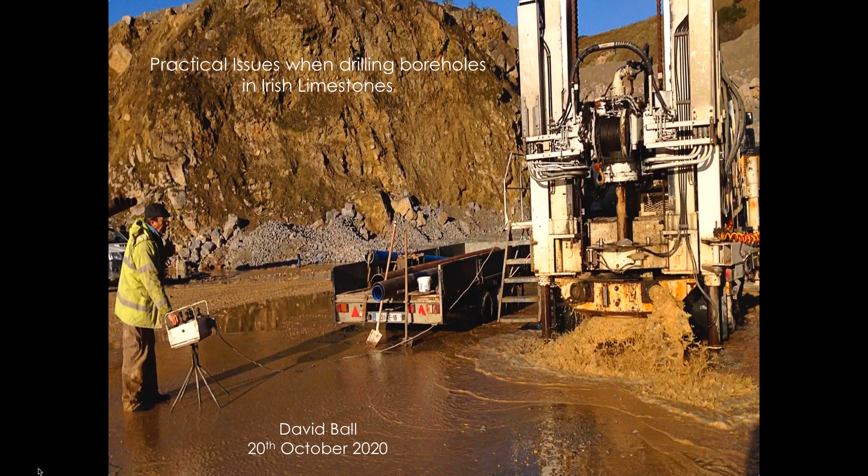As you can see, drilling in limestones in Ireland can be both rewarding and exciting, and it sometimes can be stressful. When you're drilling in limestones in Ireland, you're going on a trip down into the unknown. You can forget your conceptual models of predictable groundwater flow in a porous media. Instead, what you're doing is going down into a world of impermeable rock, hoping to find a water supply.

Hopefully find some breaks in the rock. And it's solid rock, it's impermeable rock. Hopefully some of these breaks will have been widened by karst solution weathering. Hopefully some of these conduits, breaks in the rock, will be interconnected and you'll be able to get a water supply. In essence, you're going into a subsurface world where the groundwater flow system is taking place in a plumbing system. Imagine a series of drainage pipes, wide pipes, underground. You're trying to hit one or more of them.

This presentation provides illustrations that support the detail in the paper that I've got in the proceedings. I can't cover everything in this presentation. I don't suggest that you read the paper right now. I suggest you keep it, so that when you're perhaps going to get involved in some of this sort of work, you can read it beforehand, and hopefully it'll give you some pointers, some tips on how to proceed and how to set things up.

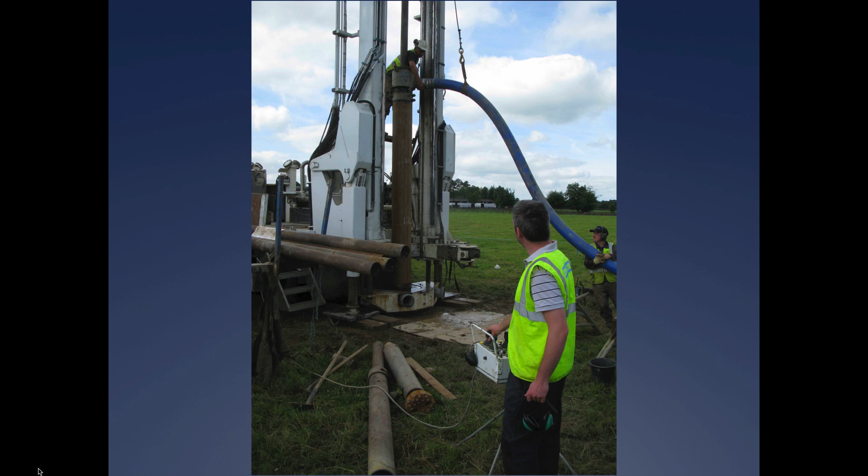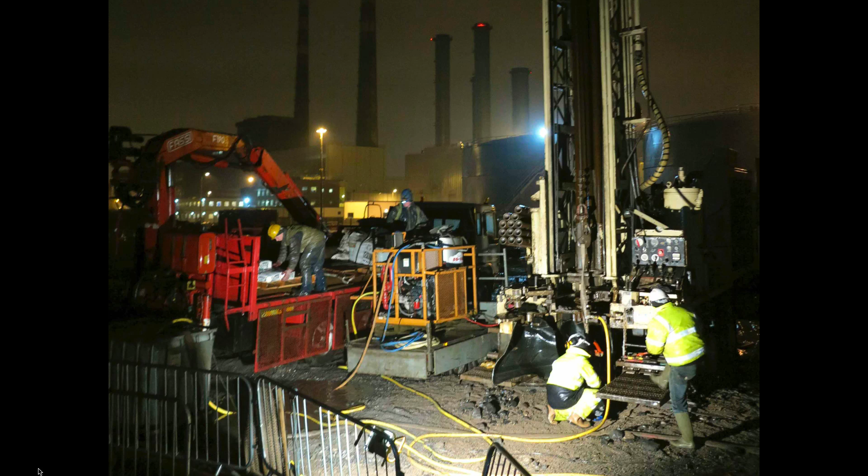The first image is making a fundamental point, and that shows that a hydrogeologist is a part of a team. Here I'm stepping in to run the rig whilst the driller is engaged on something else. Here's Oliver Higgins working in Kildare. He's helping the driller use a Symmetrix system while going into the Waulsortian below the sands and gravels of the Kildare aquifer. And here's David Gagan and Bruno Taillard doing cement grouting next to the power station in Poolbeg, drilling again into the Waulsortian in Dublin Bay.

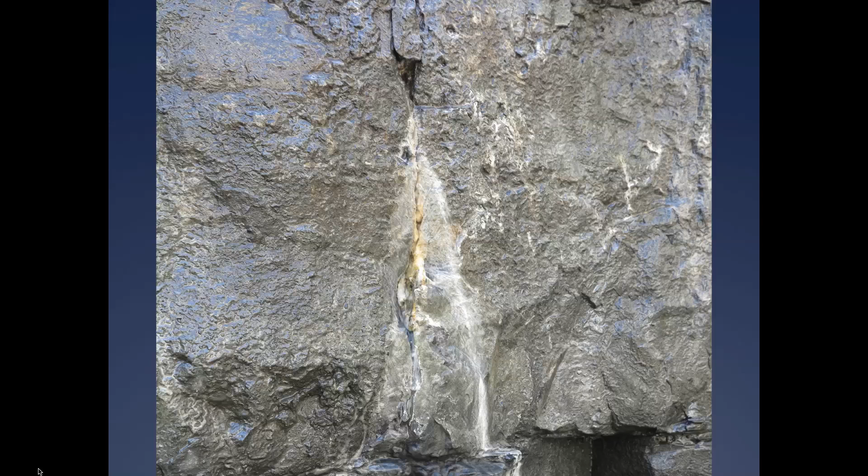When you're going off into the subsurface, you're hopefully going to find something like this. This is a small crack in the limestone in Dublin, and that'll just give you a small water supply. Hopefully you can do better than that, but that's the sort of thing that you're aiming for. But you can see there's a solid mass of rock around it. Here's a small conduit with iron staining on the inside of it, and you can see a whole lot of closed cracks all around. This is again in the Waulsortian.

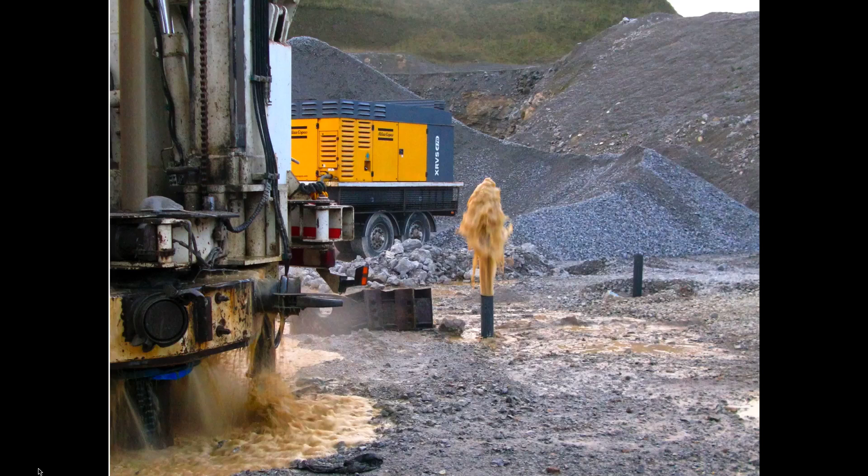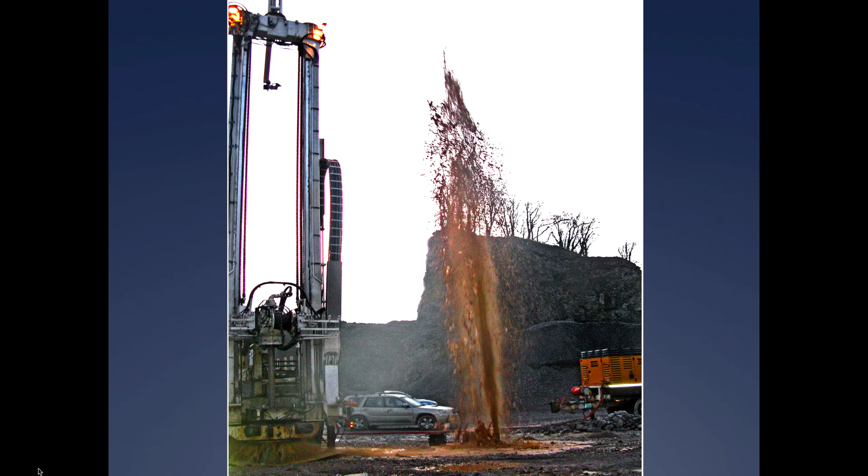The other main thing is that you're going to encounter heterogeneity. Here we're drilling a borehole, and the water and mud coming up the borehole is actually finding it easier to go along a cave which connects to an exploration borehole that we drilled before, and that's why the water is rising up out of that black pipe on the right hand side. And to give you an idea of how dramatic it can be, that's a few minutes later. My car in the background did survive.

With a new client or an inexperienced engineer, you need to put an effort into ensuring that they understand that on a new, unexplored site, it's not sensible or logical to expect that anyone could know whether or not there's an open interconnected fracture exactly in the path of a new borehole. You make it clear that your job is to work with the driller to make the best decisions in the light of the evidence that you develop and any potential that you and the drilling team encounter.

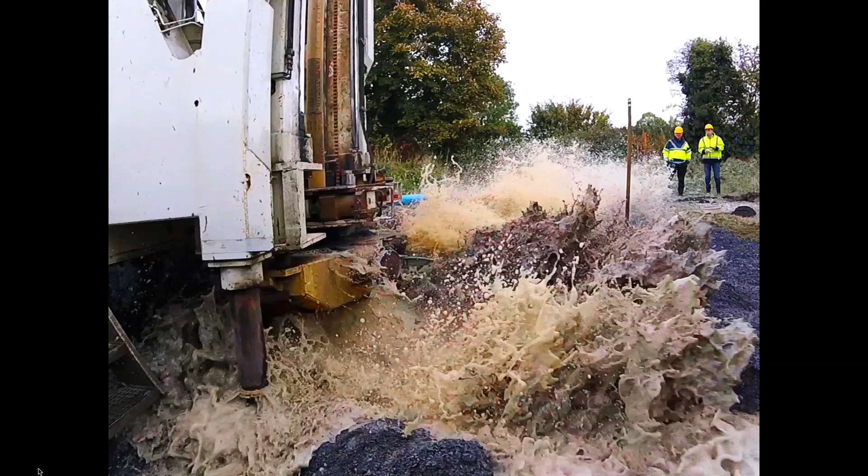The best clients are clients, for example, like Michael O'Hora and Stan Cullen from Laois County Council, who will come to the site and actually work with you and begin to understand all of the thought processes, all the observations, the measurements, the care that's taken when trying to construct a borehole in limestones in Ireland.

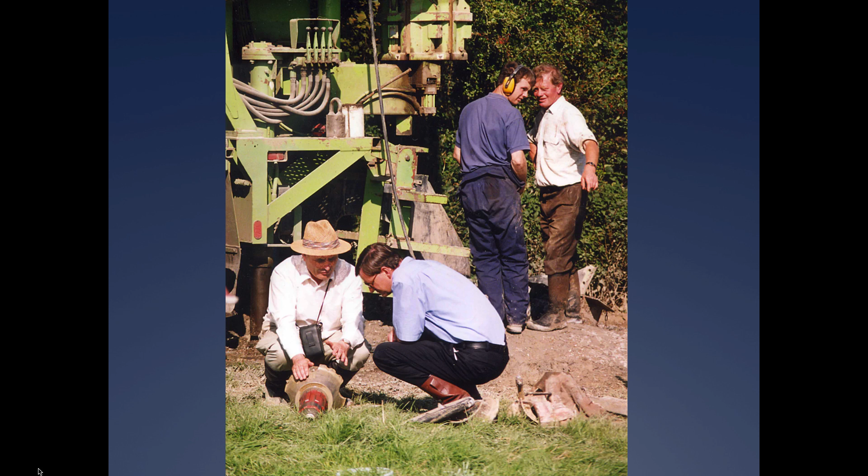Another example of a very good client would be someone like James O'Callaghan with a hat on the left. May James rest in peace. He died on the 2nd of October 2008 in a drowning accident. But here, having spent 10 years observing, watching and working with us, he's actually taken over my job and is explaining to Barry Martin, who's Head of Water Services in Limerick County Council, all about a down the hole hammer.

Another important, essential practical point to make is that it's important to ensure that you actually get an arrangement or a contract with the driller that actually gives you the capacity to be able to make proper decisions during the course of the construction work. The hydrogeologist should negotiate the agreement with the drilling contractor on behalf of the client.

I strongly recommend that you don't get involved in carrying out a scope of work and specifications for drilling in limestones that's been put together by somebody else who's never actually directed groundwater work in such conditions. Do not accept a specification for a job that involves drilling a final production borehole where the depths and the diameters and the yield and the ancillary tests are all determined and priced in advance.

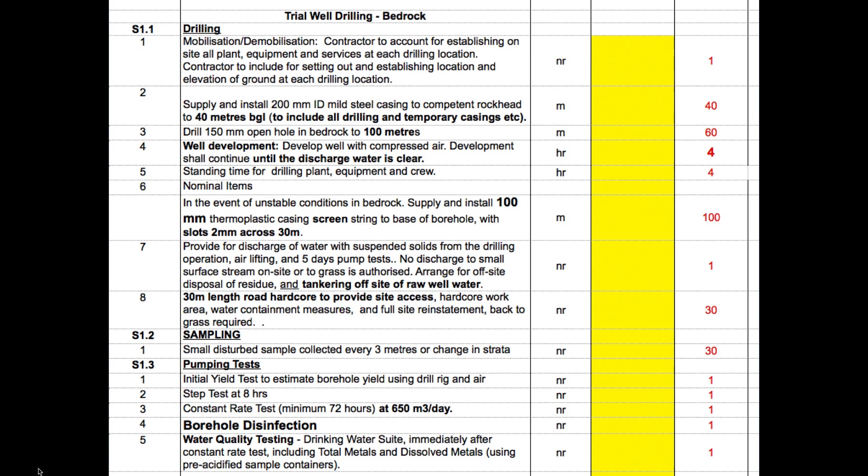Instead, I suggest you work on what's called a working day rate, where the drilling contractor provides all the agreed equipment, the fuel, insurances to carry out such work as is necessary and agreed in the light of the findings as the work progresses, and provides the materials at cost, plus 5% for ordering and delivery. It's much simpler.

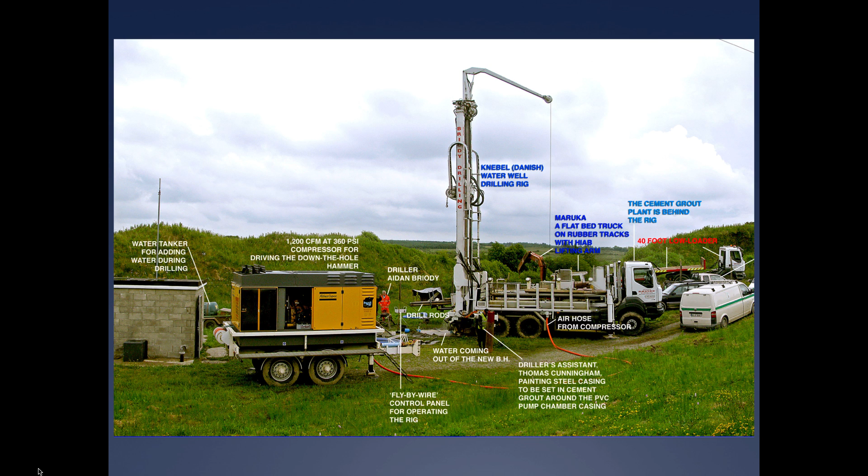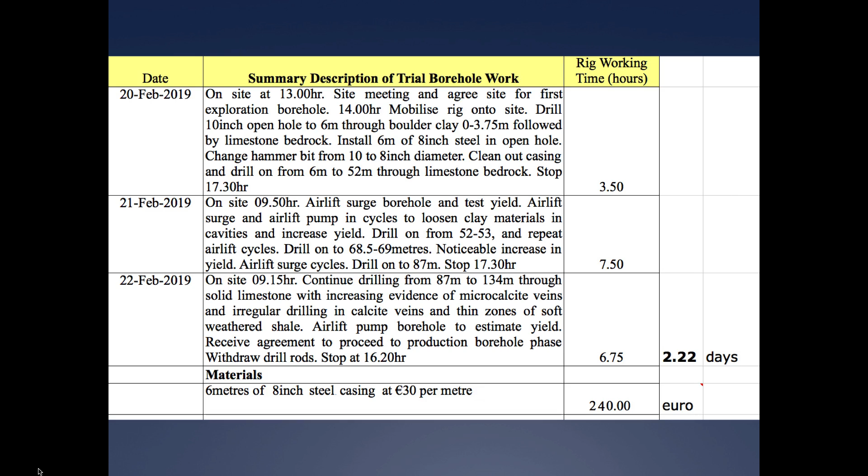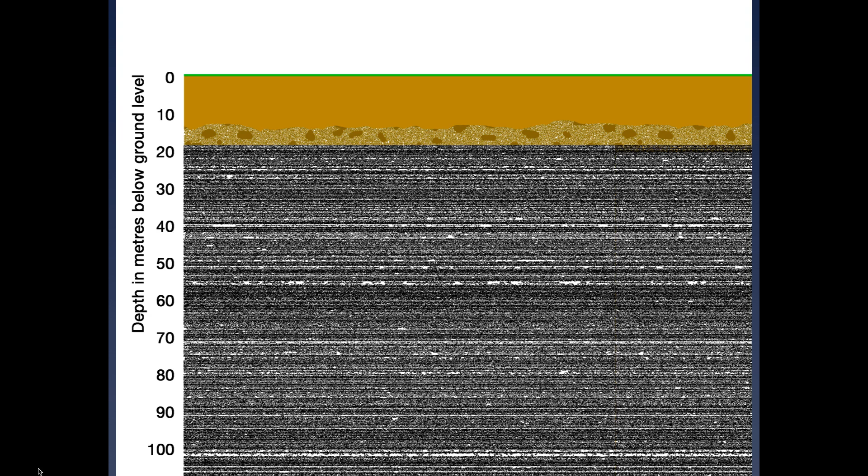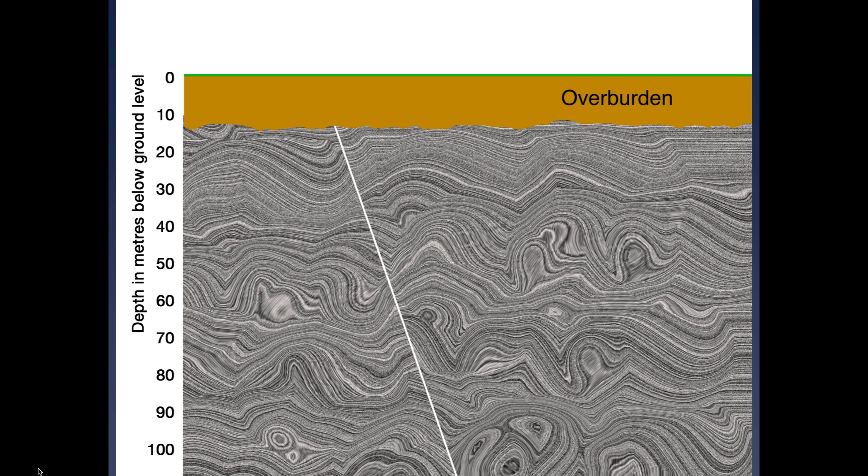When you do a desk study before you get work on the site, you may get the impression that the geology is simple. It might indicate that the site is underlain by a sort of monotonous layer of shaly limestones, or it might indicate it's massive limestones, let's say like the Waulsortian, which hopefully might have a fault in it. You've got overburden sitting over bedrock. This shows you that you're actually going into a rock which doesn't really have much water in it. You might be lucky if you hit the fault, but it demonstrates the uncertainty of work in limestones.

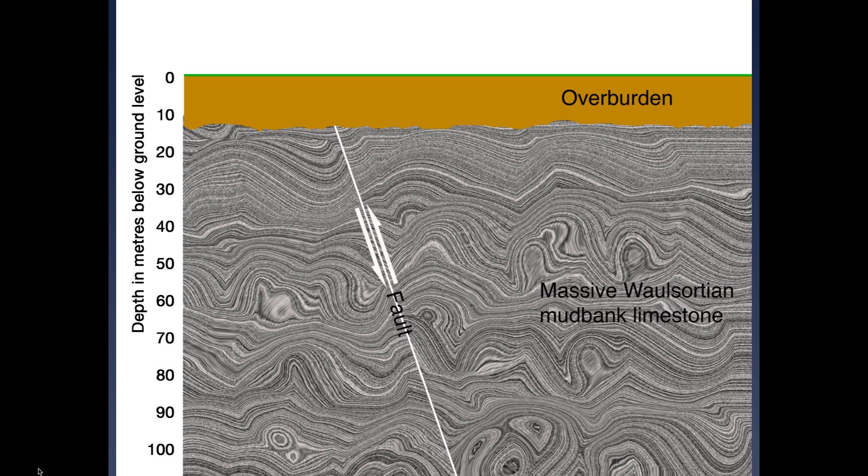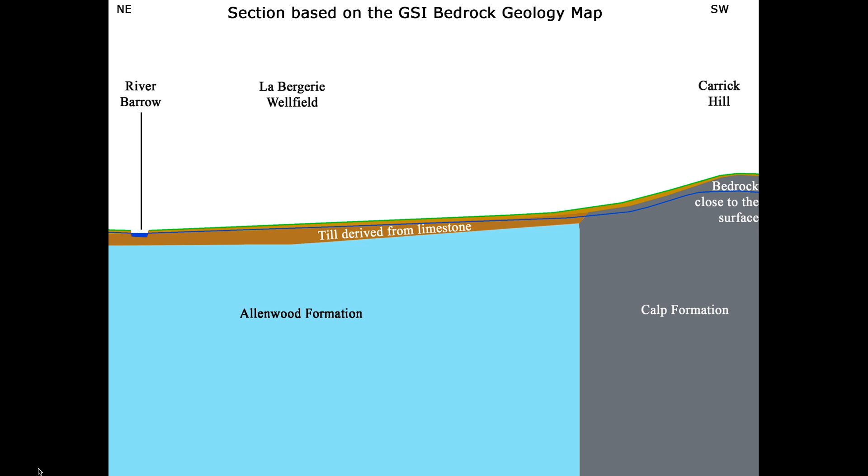One of the other things that's important to remember is that the geological maps tend to show hard boundaries between two different rock types, and that gives the impression that on the left, if you drill a hole, you're just drilling into the Allenwood. On the right of a fault, if you drill a hole, you're just drilling into the calp limestone. However, don't give up. Don't assume that, because this is more likely what you're going to find.

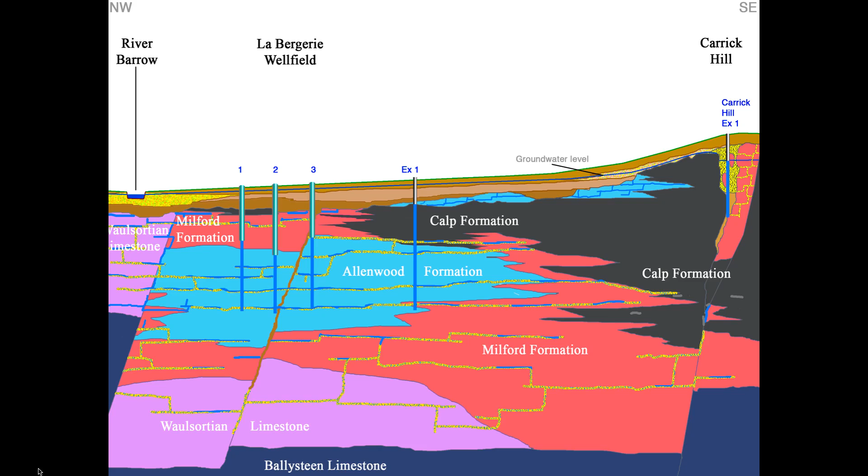Remember, these limestones were laid down at the same time under different conditions, and they interfinger between them. So if you go into the calp and you don't get any water, as I did, for example, just south of Portarlington, drill on, and you find you've got a borehole which will give you 1 million litres a day.

As you don't know precisely what you're going to find in that narrow sample of a 6-inch or 8-inch or 10-inch hole, it's wise not to drill a production borehole immediately. The best thing to do is to drill an exploration borehole. The following illustrations show roughly the sequence and way of doing that.

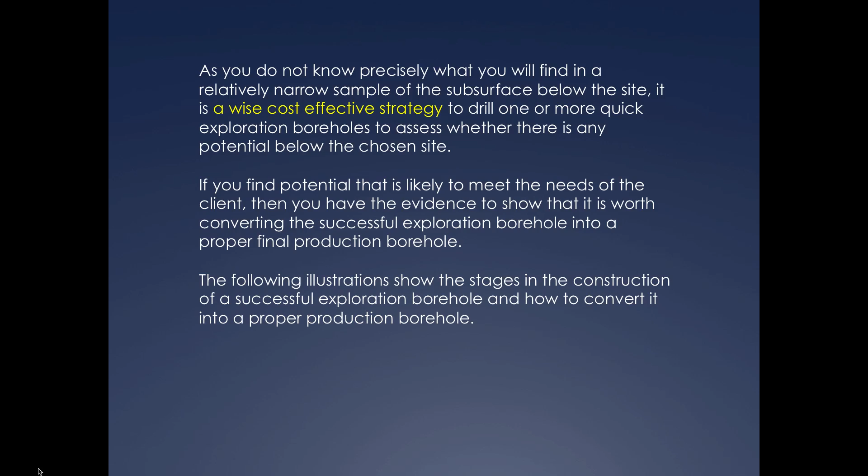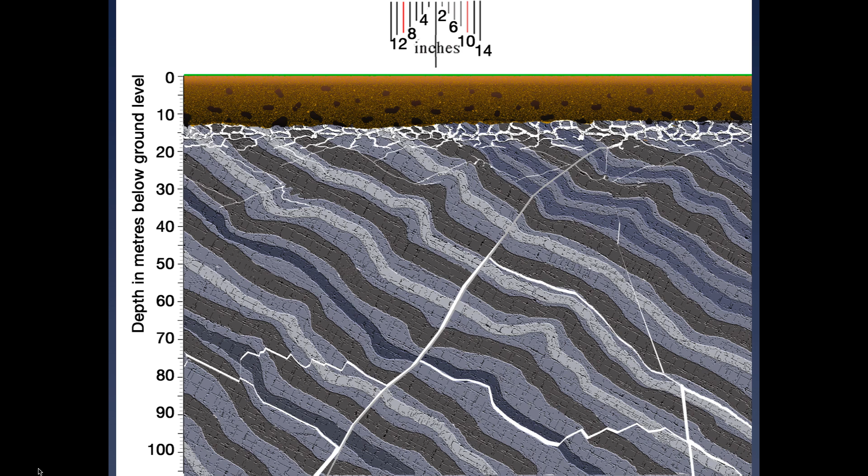Here are some diameters, just to give you an idea of the different diameters I'm going to show in the course of these illustrations. They're in inches because that's what we tend to use when we're drilling. There's obviously huge vertical and horizontal distortions in these diagrams.

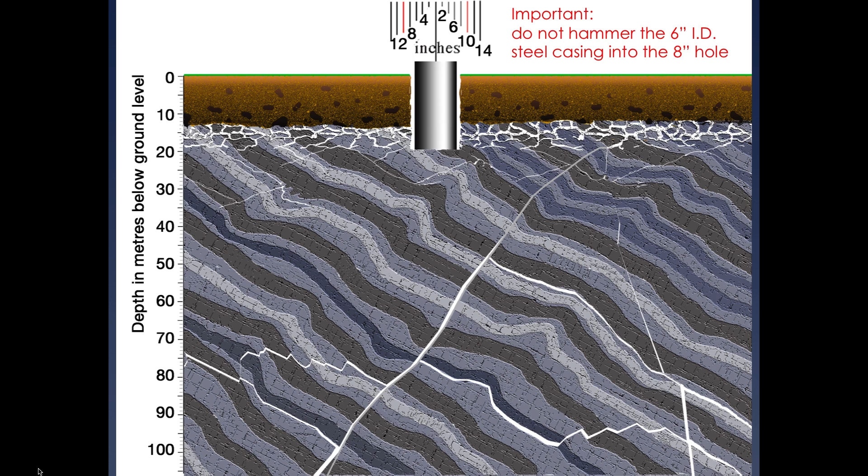The first step is to drill down through the overburden with a down the hole hammer, down through the epikarst until you've got to stable rock. Then you take the hammer out and you put some casing in. The important thing about this is you may want to take that casing out, so don't drive it into the rock. Don't hammer it in. That's why we're drilling at 8-inch diameter and putting a 6-inch casing with a view that if this hole is successful, we can take this casing back out.

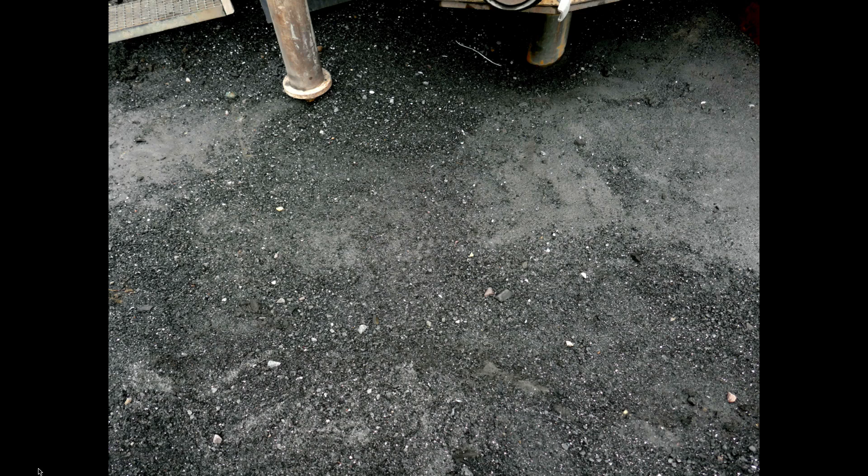Then you drill on and you start to find you're going into a few small fractures. You're starting to get a feel for what you're getting involved in. While you're doing that, what you need to be doing is looking very carefully at the cuttings that are coming out. This is ordinary cuttings from an ordinary limestone. You need to be looking to see if there's any sign of weathering or any sign of movement of water through the rock on the small fractures in joints in the bedding.

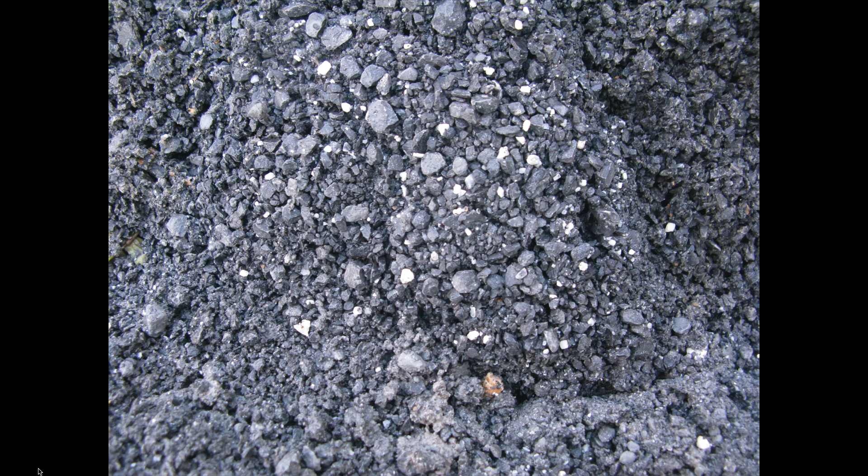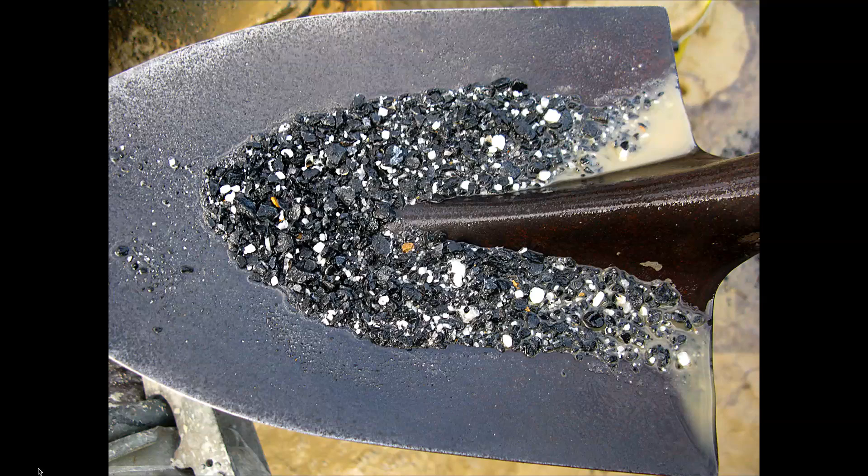Keep on using your shovel. Put it underneath the place at the back of the rig and look for, as you can see in this shovel here, a few specimens of clay, which are hard clay that's probably been washed out of some small joint, showing that the rock has been weathered. You also can see there's a lot of calcite, but you can't see any iron staining on the calcite. It doesn't look as if that calcite, which is possibly a fracture going through the rock, it doesn't look as if water has actually dissolved that calcite.

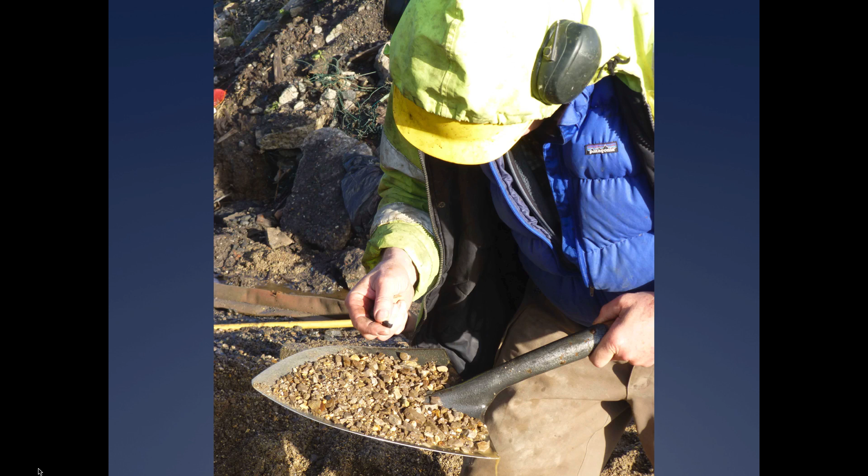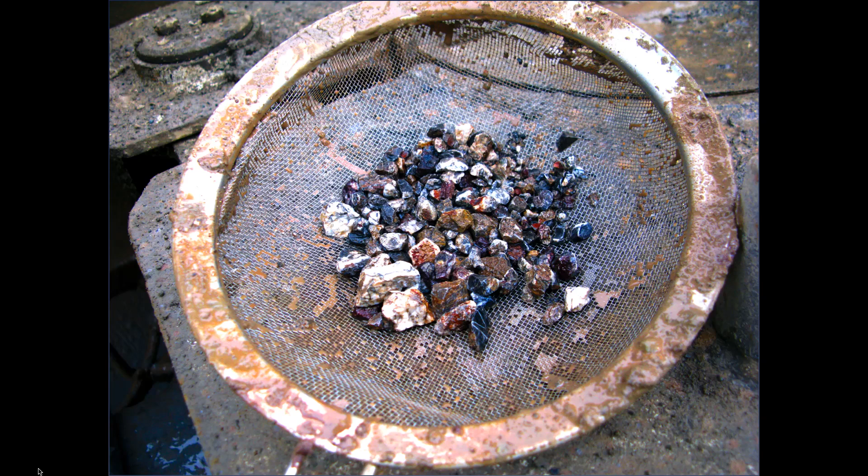Here's an example of me looking at a shovel of a dolomite which has been very heavily weathered. It's almost become like sugar, some of this. When it comes up, sometimes it's sandy. You can actually almost begin to believe in porous media when you see this stuff. We find that this is very productive, but also sometimes can be unstable. Here's an example of just a sieve used, and you can see again on the calcite here the iron staining. That shows that water has moved down that fracture and there is potential for water supply there.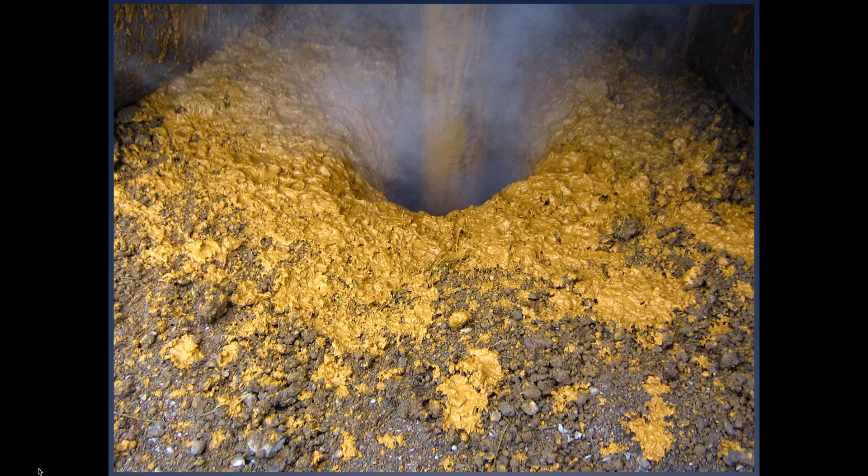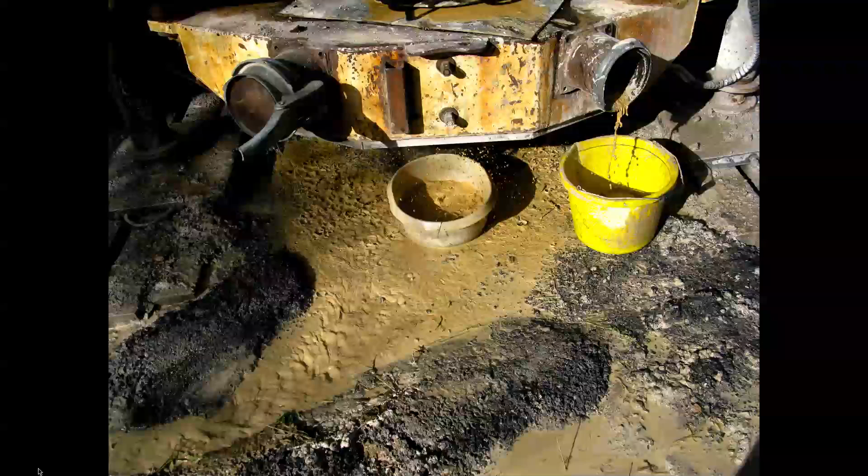This is the beginning of going into a karst cavity that has got clay in it. This is the oxide clay that you find quite often laid down in cavities, and here there's very little water coming out. It shows the cavity is probably nearly completely full of clay, but if you stop and you work at it, you keep on surging and things like this, this is what will start to happen. You start to get some flow coming through, and then if you keep on working at it, you start to get more flow.

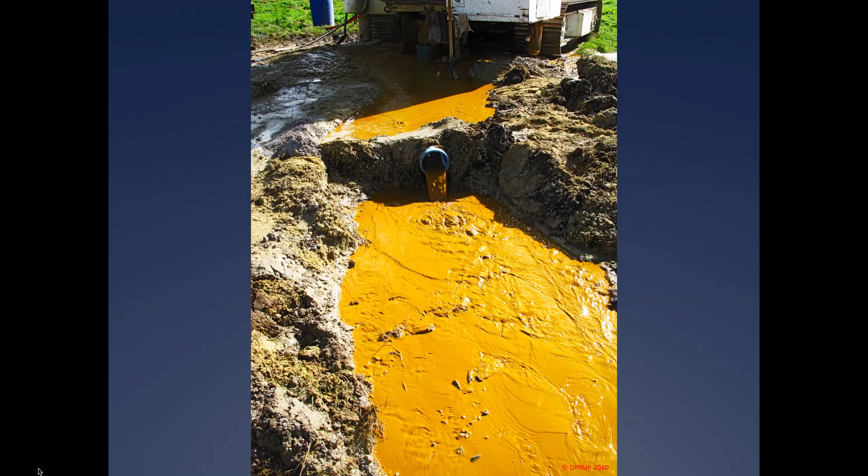So when you see stuff like this, it's a time for celebration. It's a time for excitement, because at last you're going into a plumbing system, albeit slightly clogged with clay, where potentially you can get a lot of water out of it. And you end up with things like this, a borehole where, having worked it over, we ended up with about 2 million litres a day, around about 80 cubic metres an hour.

When you've gone through clay cavities, you may find you're going back into cuttings that come out grey like this. Don't be dismayed, don't be put off, persist, because once you've found a set of cavities, you may find that there are more below, and it's worthwhile proceeding.

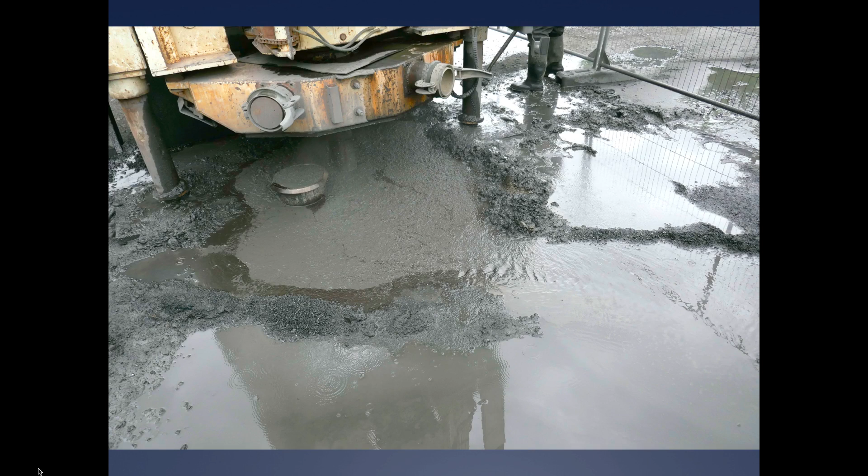Here's another feature that may puzzle you when you're drilling. You see in the pool here, next to the line of gravel, a line of cuttings, you see a sort of a black stain. It looks like oil on the surface. Here's a more dramatic example of it.

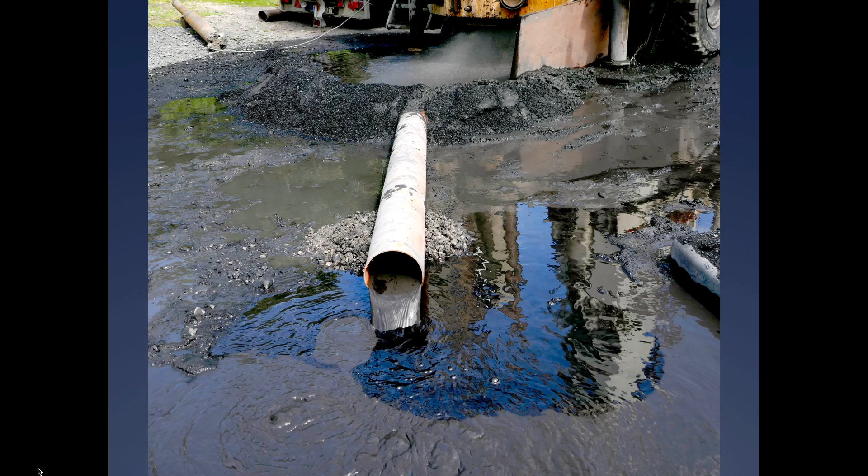It's actually not oil. It's carbon from shales. And sometimes you also get this black color and this sort of monomolecular layer when you've also drilled into pyrite in shales. Sometimes you can tell this by the smell. Don't worry about it. It sometimes actually can be an indicator, because the formation is changing, that you might get some more water below the shales. This borehole here gave about 500,000 litres a day, and you can see behind.

This is just a dramatic photograph to show that when we were actually cleaning that same borehole with foam, and the foam was sort of settling and the bubbles were all bursting, we got these different layers of black monomolecular layer of carbon on the foam.

Another feature that you might find is that when you're going into limestones that have been tertiary, very, very ancient karst, you find tertiary deposits. You might find pinks and blues and purples and greens and oranges, which are not typical of fairly recent karst sediment clays. These are often very hard clays, and they were looked at. Well, we found some in the Bog of Allen, for example, and they were dated as being tertiary. So if you find that it's not Devonian, it can actually be residual tertiary deposits embedded in the limestone itself.

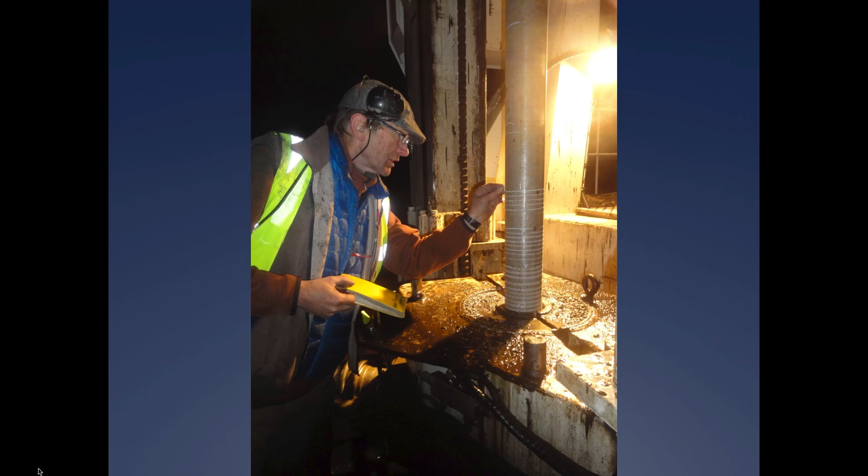Another thing you should be doing, thank you Michael Gill for this photograph, is trying to measure the penetration rate. What I'm doing there is I've got my elbow on the boss on the plate there, and I'm holding my hand steady as the drilling rig is working and the drill rods are going down. They are rotating, and I'm just holding my hand in one position, and I'm marking with chalk the amount that goes down for each rotation.

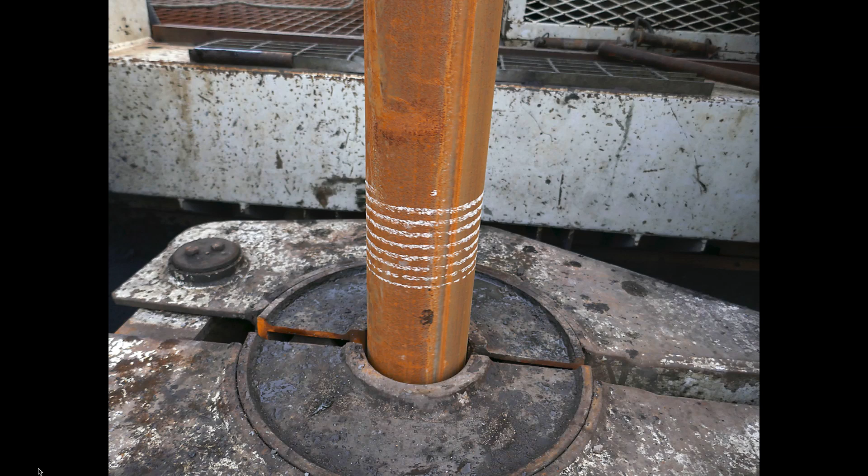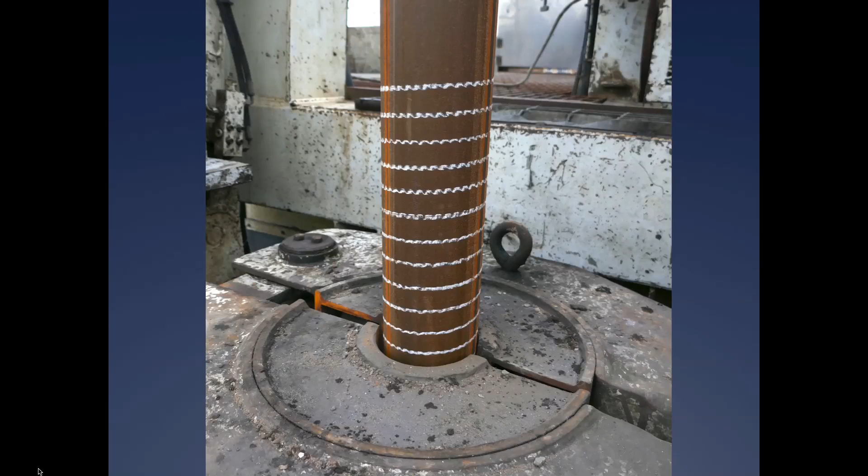Here's a close-up example of something similar. It shows ordinary hard limestone. This is actually in the Waulsortian. Hard, clean limestone, even drilling, roughly 1 centimetre per rotation. Where suddenly, here we're going into very weathered, dolomitized Waulsortian, and it's about to become sugary, it's about to become very productive. And you can see there we're going down about 3 centimetres per rotation.

You can also see the little ripples on the line. Those are the individual hammer blows per rotation. You can actually work out how many hammer blows per rotation if you count those.

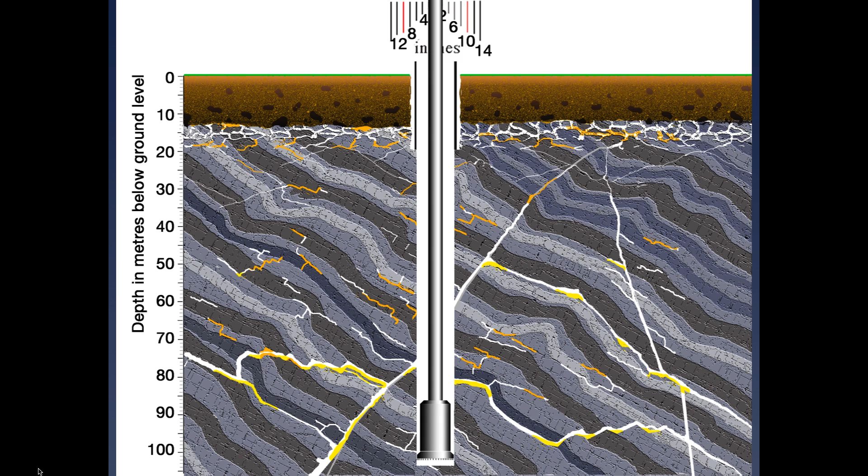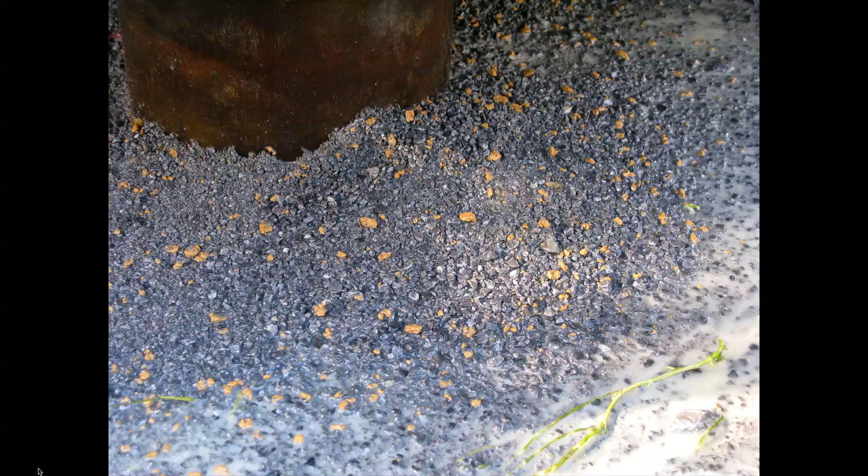Going back to the borehole, this is the exploration hole. You've gone all the way down to, let's say, 100 meters. You found that there's clay and sand in the fractures and the cavities. You then airlift it and you try and flush the clay and sand out of the cavities in order to improve the yield. This is the sort of thing that you'll find when you've been doing that. You can see these are lumps of hard clay coming up with the cuttings flushed out.

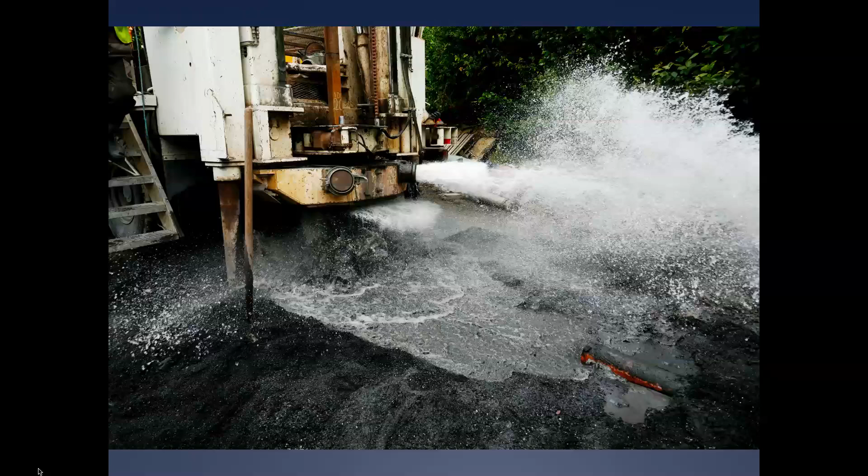You're able to get some idea of the yield when you've done this, and you can see how these cavities are also being cleaned out, and your yield will develop with this. So then, this is an example of airlift surging when the borehole is by and large clean. So you then have an exploration borehole with an 8-inch casing in it, which is productive. Now you can make the decision about whether to make that into a production borehole, and obviously in this case it is successful, so you should do so.

So what do you do? Well, first of all, you do a pumping test to try and determine the drawdown and the sustainable yield. Just a short pumping test is necessary here, and this gives you the information for designing the production borehole. So use the understanding you gain during the drilling and the yield tests to design your production borehole.

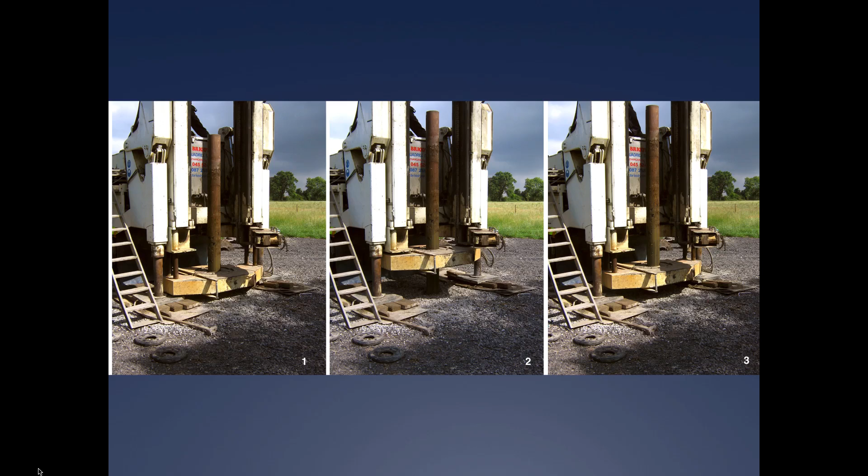And the first step is to dismantle and widen the exploration borehole. You do this by pulling out the casing. You can see in the sequence of 3 here how the bottom clamp is clamping onto the steel casing, then pulling it up, then releasing it, going down again to grab hold of it, again to pull it up. That's the way to pull out casing. You should use a rig if you can that has got that capacity.

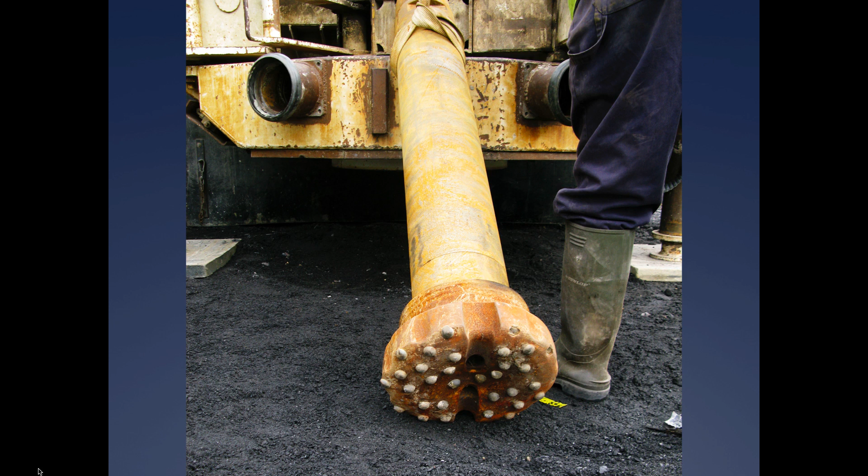This is a 12-inch hammer which you're going to use, having pulled the casing out, to start to create a hole which will enable you to put in the pump chamber casing. You've decided, as described in the paper, that you're going to use a 6-inch pump, you're going to use an 8-inch OD casing, therefore you need to be able to get a 2-inch annulus at least around that for proper cement grouting, so you're going to go in with a 12-inch hammer.

Here we are going down to the bottom of the epikarst, then putting in 14-inch casing. Here you can put it in and ram it in if you want to. Then here it is in profile, and what I've done there is I've backfilled with gravel up to the bottom of the 14-inch casing. The idea of that is so that the 12-inch bit, which is going to continue drilling, is able to bite into the rock, but it's also got something fairly solid in the middle, but also the gravel is going to be important with the grouting in a moment.

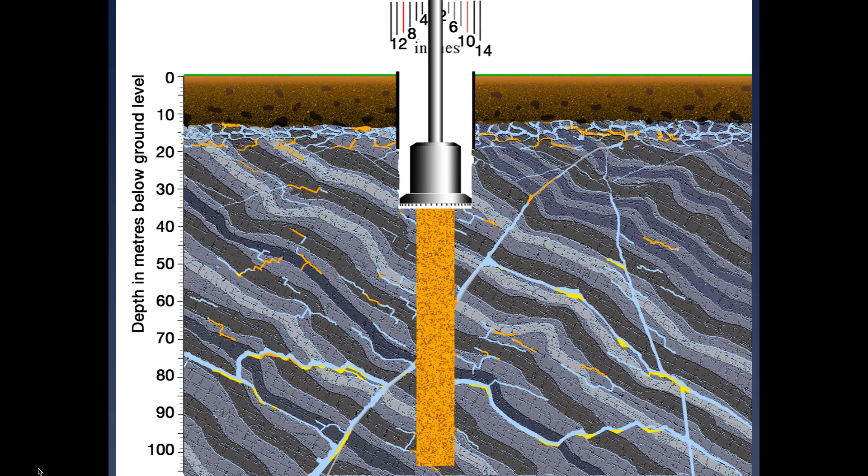The 12-inch hammer takes you down to the 35 meters, which is where we decided you're going to put in the pump chamber casing. You then take the hammer out, you then put in your PVC pump chamber casing. You then put some sand at the bottom of the PVC pump chamber casing around the bottom there to ensure that any grout you put in the annulus doesn't go inside the casing. The gravel below that is preventing grout going down the rest of the hole.

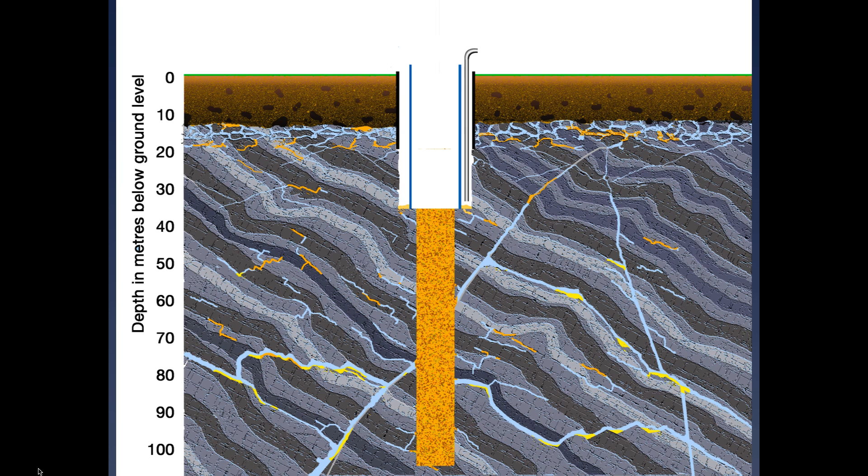There are lots of different ways of grouting, but this is a very simple, secure way of doing it. It doesn't take very much time to actually put gravel into a 6-inch hole and backfill it like we have done here. That's the casing in profile. Then you put in a tremie pipe, which is bound to about 1 meter above the top of the sand around the bottom of the pump chamber casing. Connect that to the grout pump, and this is just showing the water in it. Naturally, you've got water on the inside and the outside at the same level.

You then grout, and probably because it's 35 meters, you might do it in 2 stages, like this. Because you've got to be conscious of the compression strength of the casing and the weight and pressure of the grout, it would be a good idea to fill up the inside of the casing with water. Then you pull out the tremie pipe to above where you've just grouted, because that grout is starting to go off, and then you grout again, and you grout up to the surface.

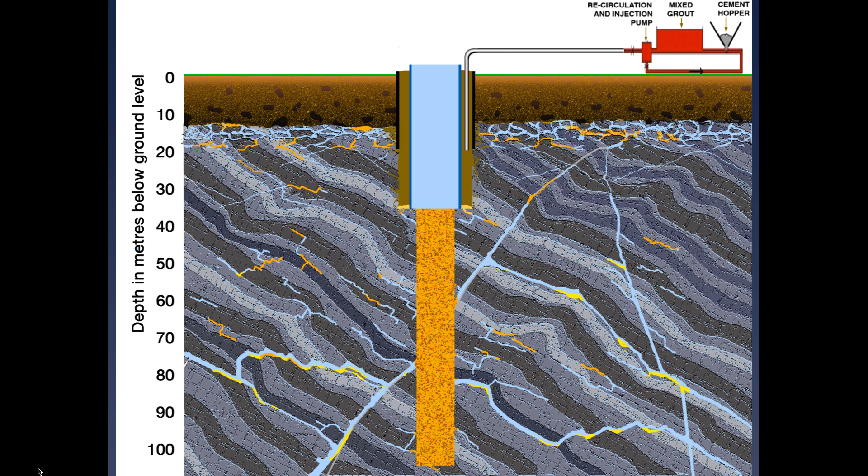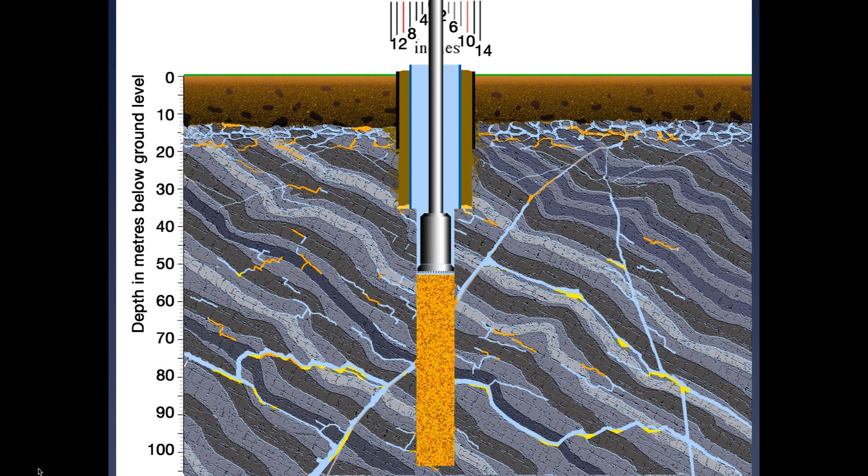Then you go back in, and all you need to do is to clean out the 6-inch hole. The yield from a 6-inch hole depends upon the size of the conduits that you've intersected with the 6-inch hole. You don't get a higher yield by having a wider diameter. And you can get an awful lot of water up a 6-inch hole, so you don't need to re-drill for a production borehole. You can just literally gently clean out using either a 6-inch or a 4-inch hammer. And you go down and you keep on flushing, you keep on working it over to try and improve the yield of the hole.

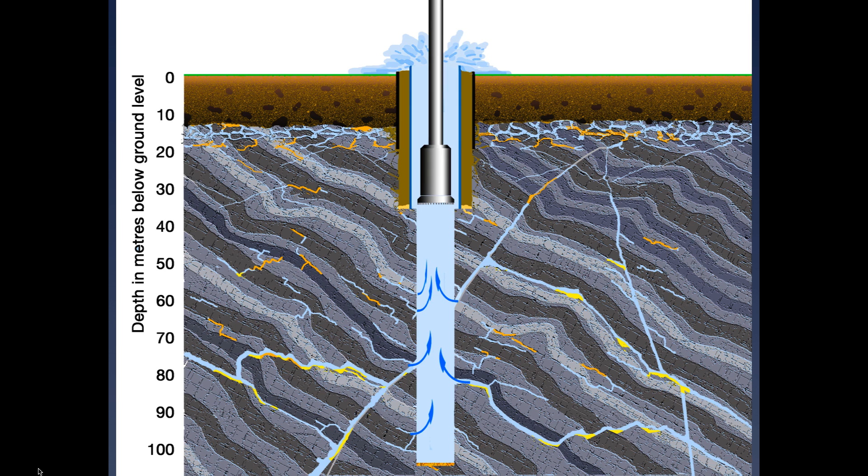Then you come up inside the casing, do some airlifting just to see what the yield is. The yield will be less than when you've got the hammer at the bottom of the hole. Then you put in a pump, and you can do pumping tests, and there you have it, basically an exploration borehole converted into a production borehole.

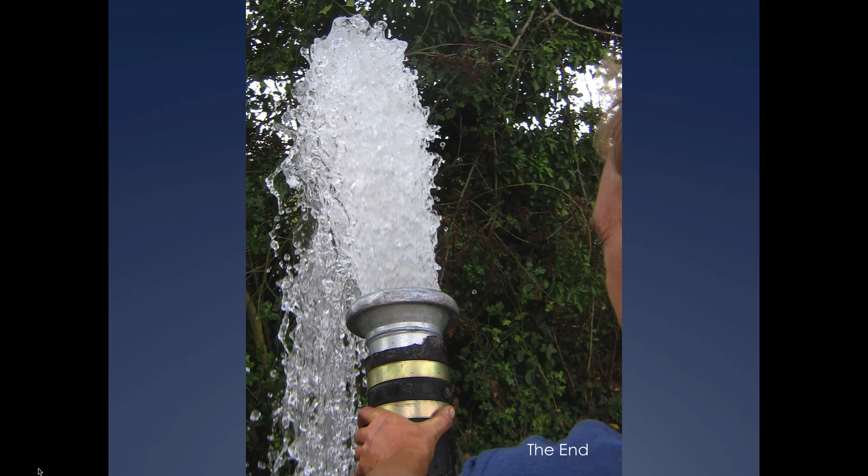That's the end. And in summary, in conclusion, I think that water supply borehole exploration and development in Ireland requires a combination of a good driller, an experienced driller with powerful equipment, the full-time supervision of a hydrogeologist or groundwater engineer, an engaged client with realistic expectations, and an arrangement or a contract with the driller that allows adaptation and yet ensures fair payment to the driller.

It's normal to be anxious about the uncertainty of drilling, but all the hydrogeologist and the driller can do is use all their skill to make the best for the client of the opportunities in the subsurface as they present themselves during the work. Each hole is different, a lot is learnt every time, but the main thing about it is it can be exciting and fun.